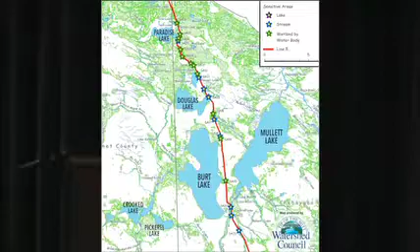This particular pipeline happens to traverse through the Straits of Mackinac, but not only that, it also goes under the Indian, Pigeon, and Little Sturgeon rivers, passes in close proximity to many of our sparkling inland lakes, and goes through about 10 miles of wetland habitat.

The wealth of natural resources we have here in northern Michigan make us uniquely vulnerable. A pipeline failure in this region would not only be significant to the health of residents and visitors, but also to the water resources themselves and the tourism industry it provides. We all know our quality of life is linked to the health of our waters, and our economic well-being is linked to the health of those waters.

Therefore, it's in all of our interests to help protect our northern Michigan water resources from the devastating impacts of a pipeline failure. So here we are tonight. Our goal is to bring greater attention to pipelines and the way the community can work collaboratively to reduce potential risks and impacts of pipeline failures. This is critical to the future protection of northern Michigan water resources and aquatic species, as well as local communities that depend upon the high water quality for their way of life.

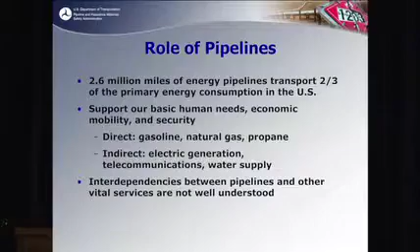Our agency handles both pipeline safety and hazardous materials safety. I'm going to talk about pipeline safety, since that's the office I'm in. We regulate about 2.6 million miles of pipelines that support various aspects of the industry, such as electric generation and transportation systems. Interdependencies between pipelines and other services aren't well understood because the economy is very complicated - one industry feeds another, so the direct role of pipeline transportation is a little unclear.

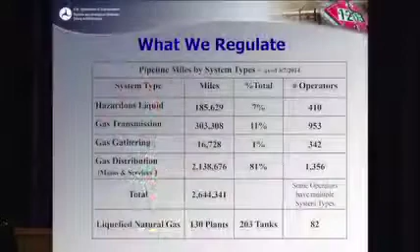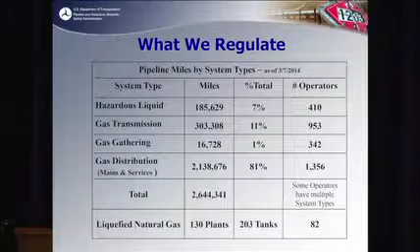Our mission at the agency is to protect people and the environment from the risks of transporting hazardous materials by pipeline. So what do we regulate? There's about 185,000 miles in the country of hazardous liquids pipelines operated by over 400 entities, over 300,000 miles of gas transmission pipelines with about 950 operators, and then gas gathering, and the bulk of it is gas distribution, for which we issue regulations.

Most of the enforcement and inspection activities are done at the state level for all the distribution systems in the country. So if you have natural gas distribution in your neighborhood, it's inspected and regulated by the Public Service Commission here in Michigan.

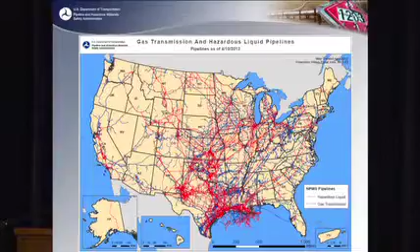So there's a picture of the pipeline system - the red is hazardous liquids, the blue is natural gas transmission pipelines. Historically there was a lot of energy production in the Kansas, Oklahoma, Texas areas, so there's a lot of pipelines that originate in that part of the country and transport material out to this area and others. Approximately 185,000 miles of hazardous liquids pipelines, 70% of that involves interstate commerce. I'll talk about alternate modes of transportation in a minute that present different and higher risks.

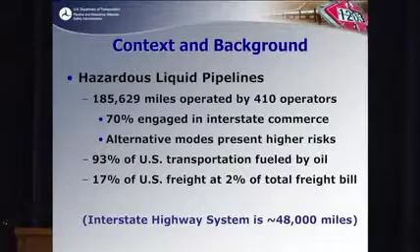93% of U.S. transportation is fueled by oil. It accounts for 17% of the total freight transported in the United States at just 2% of the total freight bill, so it's a very efficient process.

By comparison, for hazardous liquids, there are alternatives. A truck can hold about 9,000 gallons of oil or refined products - that's a pretty big truck, most are a little smaller. Barrels is the term we use more often. Rail cars hold about 33,000 gallons.

If the topic of discussion tonight is primarily Line 5, as Jennifer mentioned, it's not the only pipeline in the area, but the capacity of Line 5 is published at 540,000 barrels per day, which equates to approximately 700 rail cars or over 2,500 tanker trucks - numbers to keep in mind to put into perspective the amount of product transported through the pipeline.

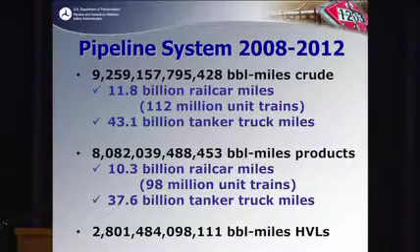So there were over 9 trillion barrel miles of crude oil transported in this 5-year window that I'm looking at, which equates to 11.8 billion miles by rail car or 43 billion tanker truck miles. So that's just the crude oil transported in 5 years.

And also, this is refined products, and this is also highly volatile liquids, HVLs.

Can you hear me when I try and read my slides? Because I hear a difference. But I have to look at the slides or I don't know what I'm saying.

Anyway, the numbers are kind of staggering because you've got close to 20 trillion barrel miles of various products that are being transported in that 5-year window.

And so that slide shows the alternatives at this point in time. We don't have the infrastructure to handle those other methods. And historically, rail didn't account for more than like 2 or 3% of the transportation.

And you see a lot of news now that rail is being used a lot more often to ship crude oil, and it's got some issues, and we're seeing some of those issues. But historically, it hasn't transported a whole lot of the product.

And trucking was really only used to take the gasoline from the terminal to your local gas station. That's the extent of what trucks have been used for in the past for the most part for transportation. The pipelines account for about 70%.

And then the second largest mode of transportation for the oil and refined products is by barge. Maritime transportation was over 20%. I don't talk about that much because they don't do that much around this part of the country.

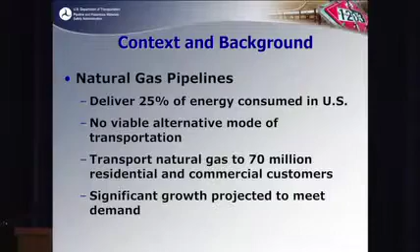So fortunately, it can work convenient. It comes to our house. So, but there aren't a lot of alternatives for natural gas.

This topic of this forum is really not related to natural gas so much, but there is some work being done on railroads. They're looking at some locomotives that are powered by liquefied natural gas, where they can carry a natural gas tanker or two behind the engine and that kind of thing. But it's moved intercontinentally across the oceans.

But to move it around the U.S., it's primarily 100% by pipeline. So here in Michigan, we have some transmission pipeline mileage. These numbers are on our website.

There's a little over 500 miles of pipeline for highly volatile liquids, which is what HVL stands for. That's propane, ethane, other products that evaporate very quickly and are generally gaseous at ambient temperature.

We're a little over 1,268 miles of crude oil pipeline, 1,400 plus miles of refined products, and 8,700 miles of natural gas transmission lines. So that's what's here in your state. And these numbers are on our website. You can look that information up if you're familiar. I'll have a link or a slide show on our website here in a minute.

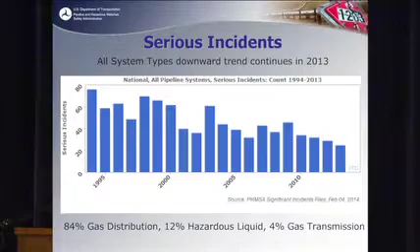Okay, so just to briefly touch on, over the past years the trend in serious accidents has been reducing. Serious accidents are defined as accidents where there was a fatality or some number of injuries. It's a subset of the reportable incidents.

Unfortunately, we've seen an uptick here in the last couple of years on the hazardous liquid accident side. We're not real sure why, or what we maybe need to do differently to reverse that, or whether it's actually a trend or just a blip in the data. But the numbers have not been so good the last couple of years in that program.

So the numbers are a lot higher if you look at the causes for excavation damage, for example, in distribution systems, which is why we focus a lot of attention on it. These other items we address during our typical inspections, we always look at their corrosion programs and things like that to try and get a handle on those processes.

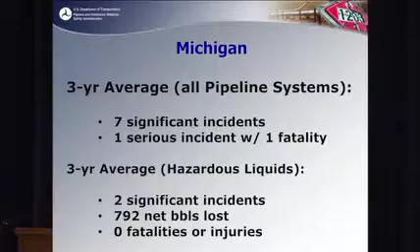We also have a number for the barrels spilled, but they recover a certain amount of that or some portion of that, so they'd also report the amount that was lost net. But in those hazardous liquids, there were no fatalities or injuries in that 3-year period here in Michigan.

So, 811, we always support the effort here to call before you dig to prevent the excavation damage.

We don't oversee pipeline siting or routing, so you see a lot of discussion about new pipelines. The next item here, eminent domain - people get their property condemned for a new pipeline to cross it. We don't give them that authority. We don't have anything to do with that process.

We don't monitor or track commodity shipments. We look at what products are in the pipeline because we have to look at the threats to the pipeline. So we understand what products are being transported, whether they're corrosive, those kinds of things, whether internal corrosion is a threat to the integrity of the pipeline. But we don't monitor what's in the pipeline at any given time. Most pipelines operate in batch form, so a refined products pipeline, for example, there'll be a batch of gasoline going through it, and then they'll switch and start putting diesel fuel through it. They might even put highly volatile liquids, propane or ethane through it, and they're put in batches, so they don't report to us what product is in the pipeline at any specific given time.

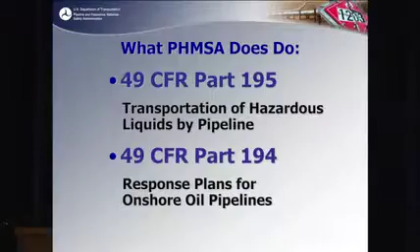So what do we do? Well, we have regulations. We have two primary parts that apply to hazardous liquids pipelines. Part 195 is the transportation of hazardous liquids by pipeline, and that's the bulk of our regulatory requirements for liquid lines. We have another set of regulations for natural gas - they're separate, I'm not going to talk about those. And then Part 194 applies to response plans for onshore oil pipelines.

So how do we spend our time? Well, we spend about 50% of our time doing inspections. We do failure investigations. The stakeholder outreach is what I'm charging this time to today. Construction oversight is also inspections.

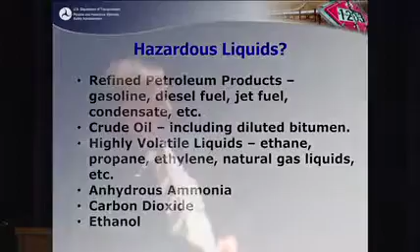So to talk a little bit about what is in Part 195, first of all, what's a hazardous liquid? That part applies to hazardous liquids, including refined petroleum products, gasoline, diesel, jet fuel, natural gas condensate, crude oil, highly volatile liquids, ethane, propane.

A couple you may not be familiar with: anhydrous ammonia. There are a couple of pipelines that transport anhydrous ammonia, not up here, but in the Midwest. Carbon dioxide—there's some more pipelines being proposed for putting that carbon dioxide underground, getting rid of it. They're using it to enhance recovery, injecting carbon dioxide to help produce new oil.

And ethanol was a big thing, and we thought there'd be some pipelines coming around batching ethanol. That's kind of died down. There's some specific things you need to be aware of if you're going to build an ethanol pipeline, but we haven't had anybody, at least in our region that I'm aware of, that's actually built a line dedicated just to ethanol.

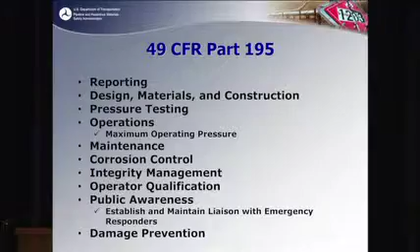So some of the things we have in our regulatory requirements: there's reporting requirements. If somebody has a release on the hazardous liquid side, if it's over five gallons, they have to call and report it to the National Response Center, which is manned by the Coast Guard 24 hours a day. They also have to submit annual reports where they talk about the mileage they have in service, different commodities they've transported.

There's a lot of information in there—they report by decade the year of installation on some of the pipes, they report by diameter, the different pipe sizes. There's some other specific things that they need to report on their annual reports.

We have regulations that cover the design, the material selection, the construction process for new pipelines. We have regulatory requirements for the pressure testing they have to do upon completion of construction, or if they want to revise their operating pressures later on. Our maximum operating pressure that they can establish is laid out in our regulatory requirements.

We have requirements for maintaining their facilities. They have to inspect valves—lots of different aspects of maintenance. They have to do patrolling, so if you have a property that has a pipeline on it, they'll fly it every 2 or 3 weeks. Those kinds of things are covered in our maintenance requirements, how they can do repairs, some things like that.

Requirements for managing and controlling corrosion so that they don't have integrity issues. Integrity management regulations—they have to do assessments periodically to assess the condition of their pipe, and then they have to take actions if they find issues.

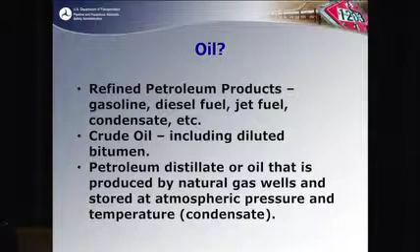Natural gas isn't covered. Anything that volatilizes or is a vapor or atmospheric under ambient conditions is not included. So propane, ethane, they're not included in what's oil. Anhydrous ammonia is not petroleum, so it's not covered. Carbon dioxide and ethanol is the same way. So there's a little different definition of what's covered under Part 194 than what was covered under Part 195.

Their facility response plans are outlined in Part 194, what they have to have in those plans. The plans are submitted to us for review and approval. Those plans need to be resubmitted every 5 years or if there's a significant change in information.

So again, the Enbridge Line 5 plan of interest to you all here is their Superior Region Response Zone Plan, which was submitted and reviewed and approved by our office. And the public version is posted if you go to our website, you go to the FOIA electronic reading room, you can review that plan.

There are portions of it that are redacted. We have the obligation under the latest act that was signed in 2011 to consider restricting back information on the worst case discharge and where that's at and how it's calculated and things like that, for security sensitive type information. And so you'll see that being redacted out of those plans. But the only other thing is personal phone numbers and stuff like that we have to take out.

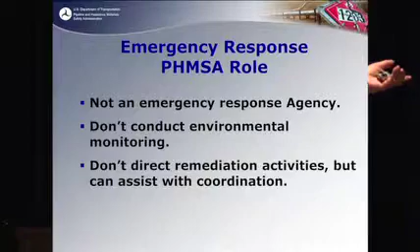So what is our role in the event of an emergency? We're not an emergency response agency. We're not going to be conducting environmental monitoring. There's a lot of environmental responders, and hopefully you talked to some of them earlier before the meeting, that do these activities, that direct remediation. But we have people that are pretty knowledgeable about pipelines and pipeline activities and pipeline maintenance and things like that can be of value to the incident command system during the incident if disagreements arise and they need to ask us a little bit about pipeline-specific questions.

And then, so what do we do? We investigate the cause of the release, and then we make efforts to verify the future integrity of the pipeline. We monitor repairs. We may require a reduction in operating pressure. We may require them to have a written restart plan, things like that before they start back up. We might issue a corrective action order that requires ongoing activities to do other additional inspections or make additional repairs, that kind of thing. That varies on a case-by-case basis based on what's happening with the accident.

And then we apply those findings either to something applicable to an entire pipeline system that we need to address with that particular company-wide throughout their whole pipeline system, or it may be something that we need to consider rulemakings and things like that to apply those findings to the industry as a whole.

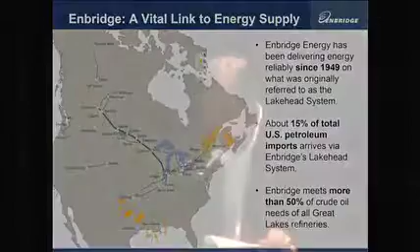So I wanted to start by giving a brief overview of Enbridge and our overall system. We operate the world's longest pipeline system in Canada and the U.S. The system you see across the map on the page is about 50,000 miles of pipelines collectively between our gathering systems, main lines, and others across North America. Movements through our system account for about 15% of all total U.S. petroleum imports through the Enbridge system. We deliver about 2.5 million barrels per day of crude oil and liquids petroleum through our system, and that accounts for more than 50% of the crude provided to the Great Lakes refineries in Chicago, Detroit, and Superior, Wisconsin.

We also are a player in the gas pipeline gathering and processing system. We own about 1,000 miles of offshore pipe and onshore gathering pipe in the U.S. Gulf of Mexico, and we gather and move about 50% of the offshore gas production in the Gulf. On the Canadian side, in Eastern Canada, we own and operate the largest natural gas distribution system in the Toronto and Ontario areas.

We also, as an energy company, have an emerging green energy platform. We currently have ownership interest in about 1,800 megawatts of wind, solar, geothermal, and heat waste recovery through our system, for a total capital investment of about $3.5 billion in green energy technologies.

On the growth side, we've got a number of growth projects underway. I won't get into detail on those today, but they total about $35 billion in committed growth and expansion projects. We've made a commitment to a neutral footprint in our development, and it really stems from our former CEO. It's something we've really committed to, and that's basically we want to produce a kilowatt of power for every kilowatt of power we consume on the pipeline right of way.

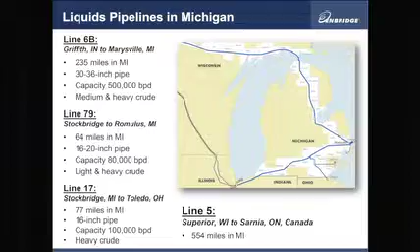And 250 of those employees and contractors are here in Michigan. Looking at liquids pipelines in Michigan, I know tonight we're really going to focus on the northern pipelines. In total, we have 4 pipelines in Michigan totaling about 930 miles of pipe, and that represents the pipeline we're here to talk about tonight across the northern system, Line 5. We also have pipe that traverses down in our 6B pipe in southern Michigan, along with 2 pipes that feed markets in Detroit and Toledo, that being Line 17 and Line 79.

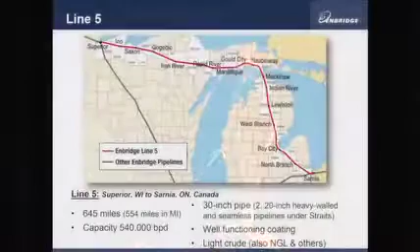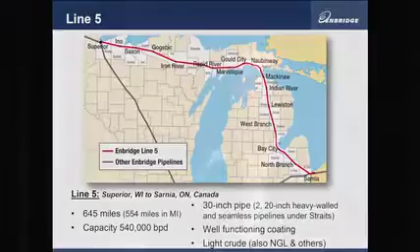Looking more specifically at the northern pipeline in Michigan, Line 5. Line 5 is a 645-mile pipeline. It's a 30-inch pipeline, with the exception of the Straits of Mackinac crossing, which consists of 2 heavy wall seamless pipes under the straits, and then it's back into 30-inch pipe for the remainder of the way. Its capacity is about 540,000 barrels per day, and it's a light crude system, which consists of movements through Line 5 that would include natural gas liquids batched with various light products, including light crude oil and condensates.

As I mentioned at the start, safety is really the cornerstone of our business. We recognize we have to operate a safe and reliable system. It's critically important to us, and it's part of every day, certainly of my life and my role. There isn't a day that goes by that we don't talk about safety, and on a percentage basis, in some cases, the better part of the day is spent on safety and operational reliability. Since 2012, over the past couple of years, we've spent $4.4 billion in the area of reliability and safety, and I'm going to talk about some of those programs as I go through here.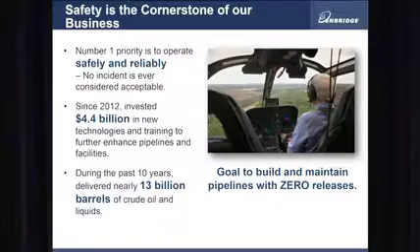We focus on going beyond just being okay. We really want to be industry leaders. We have involvement in a lot of different things, and with some of the programs I show tonight, we get involved with the development of the technology and really push to advance it. During the last 10 years, we've delivered approximately 13 billion barrels of crude oil and liquids. I can go into the safety record, which overall on the barrels is very good, but I want to say that our goal and our target is zero pipeline incidents, and that's our focus.

When you look at safely transporting crude oil, there were a number of different modes of transportation shown in the previous presentation - rail, truck, others. When you look at it from a pipeline perspective, there really are a number of components that contribute to safe operation. That being engineering design and the materials you start out with, whether it be the steel, the coating, the cathodic protection, those types of things.

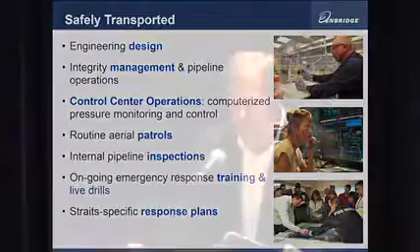The ongoing integrity management, once the pipe is in the ground and the facilities are in the ground - how do you take care of it, how do you monitor it? Control center operations, ensuring that we're monitoring on a 24/7 basis, pressures in the system, looking for anomalies and upsets. We do routine aerial patrols over every foot of our pipelines on a bi-weekly basis, so we have a lot of aircraft in the air. You may see them doing their thing, but we'd be looking at the right-of-way for any problems that can be seen from the air, any third-party activities going on, whether it be excavations and things, to really keep an eye on that.

And then finally, really looking at emergency response in the event that there is a problem - how do we respond, are we trained and qualified? It's an important part of what we do, making sure that we have the training, we have the plan in place, and we are conducting live drills. When you look at our operations in Michigan, we do have response plans, tactical response plans, which lay out where the boom would go along shorelines, where your access points would be - all mapped out in a tactical response plan for not only the Straits, but for other significant water crossings.

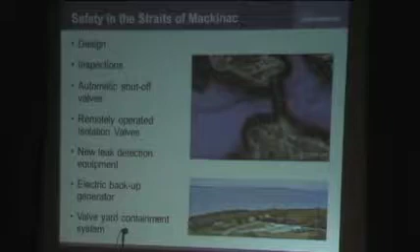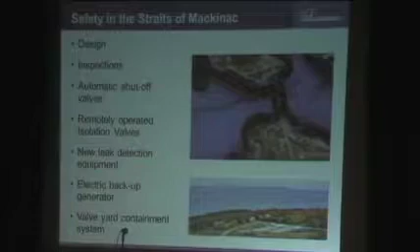When you look specifically at the Straits of Mackinac crossing, it really starts with the design of the system. Back when the pipeline was constructed in 1953, it was an extensive engineering project. It was one that took a lot of attention and focus. It was done by probably the leading energy or engineering company in North America at the time, Bechtel Corporation, and it included peer reviews by the University of Michigan Department of Naval Studies and another university to really make sure we were getting the design right. As we sit here today and look at the current state of the pipe, we look back to that design as being vitally important to that system.

Safety in the Straits involves inspections, and I'm going to talk more about that later, so I won't go into a lot of details, but both inside the pipe, understanding what's going on, and also outside the pipe, understanding what's going on with the environment.

It involves automatic shutoff valves across the Straits. In the event that there's a pressure drop, our control center operators would be monitoring that, and the valves are shutting immediately - sequencing a pipeline shutdown as an important safety feature. We have remotely operated valves, which our control center operators can operate, and new leak detection equipment and technology, really wanting to push the envelope on how small a leak we can detect in the operating pipeline system, and what new technologies exist out there.

And there are a number of them, and we've got a department whose day job is to focus on making sure we've got the latest technology. We've got electric backup generation at the Straits crossings to make sure that we can shut the valves even in the event of a power outage.

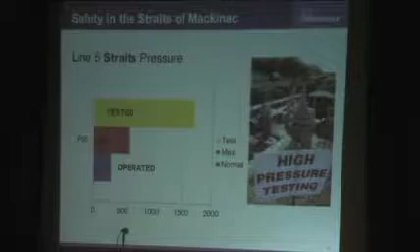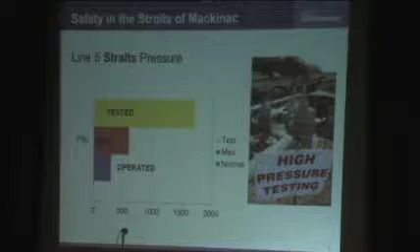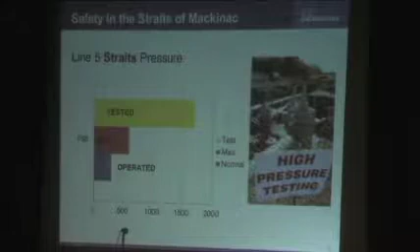Here is just a depiction of our pressure across the Straits. The pipe is about an inch thick, 20-inch diameter, seamless pipe, tested to 1,700 pounds. It was tested again as part of the installation, post-installation, so we defined the upper limit of testing at 1,700 psi. We've established a maximum operating pressure of 600 psi, so we're not going to go over 600. The pressures you see in that pipe today across the Straits are generally under 200 psi, so we're operating some very substantial pipe at a very, very low pressure. That operating range would go anywhere from 0 to 300, but on a daily basis, generally sub 200.

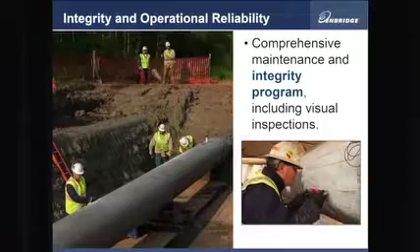I mentioned early on that we spent $4.4 billion over the past couple of years, and one big area is our integrity and operational reliability programs - taking a look at all of our pipelines in our system, doing extensive, literally hundreds of inspection runs through the pipes, identifying any anomalies detected, going out and doing literally thousands of digs, like the one you see on the map here. We dig it up, map anything visible on the outside of the pipe, do UT analysis to see any metal loss on the inside, and do a comprehensive job of evaluating that. If needed, we apply a sleeve that's welded to repair the pipe, and we do that across our entire pipeline system.

There's been a lot of talk about our incident in Marshall, Michigan, which was certainly one of the low days in our organization. It's been near 4 years now, and we've done a lot since then. We've invested a lot, and I wanted to specify exactly some of the things we've been working on since Marshall.

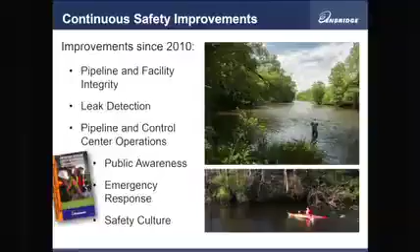Leak detection - we have a department today dedicated to this, their day job is making sure the leak detection we have is effective, which can include mass balance, where we measure what's going in, what's coming out, and the difference, to things like smart ball technology, which puts a small ball through the line, a couple of them, and detects acoustical sounds, to other emerging technologies.

Pipeline and control center operations - this is one area for us that's seen tremendous change, including a new facility. We are operating today out of a new facility. We have new procedures for our control center operators and how they operate the lines. We have new personnel, and our control center operation is now its own department with its own lead. It is fully accountable for the job they do, and we have new personnel in the form of operators and enhanced oversight and training within the control room. So big changes in that area.

Public awareness - we've increased focus on making sure people know where our pipelines are, what commodities they transport, and what to do if they detect anything, which leads into emergency response. We've created an Enbridge-wide emergency response team, pulling members from any department within the company, making sure they're trained to ICS standards - 100, 200, 300 level ICS training - to make sure our team is ready. And then exercises, making sure we're getting out - we've got a big exercise coming up in Indian River in September, which will be a large effort, including Coast Guard, EPA, and others, to make sure we're exercising a plan.

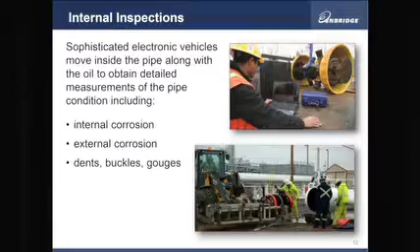Internal inspections. We run internal inspections, and I would say multiple technologies. On the metal loss, the MFL tools, we're making sure we're looking for any corrosion inside or out. We're running the new and latest crack detection tools through the pipeline systems, which uses basically medical quality ultrasound on the pipe walls to make sure we're understanding and identifying any cracks. We also have tools to identify any dents, buckles, gouges along the pipelines so that we can go in after the fact and identify those. That's an emerging area which we've invested millions in to make sure that we're pushing the envelope in terms of what can be detected from inside the pipe.

And specific to the Straits of Mackinac, we're also conducting external inspections of the pipe on a biannual basis. So every 2 years we're doing a full inspection of the crossings. We've developed and are in the process of using both remote operated vehicles. We're also working very closely with Michigan Tech in developing an autonomous underwater vehicle which is able to traverse the pipelines and get good quality data on spans and things like that, and anchors and supports along the pipeline.

And then finally, we do aerial patrols of the pipeline. I mentioned already at least 26 times per year, and then more in areas if warranted. Any of our field representatives, our field people, if there's a cause for needing to shut down and bring out aerial patrol to fly a line segment, they're authorized to be able to do that. And then finally, we're also able to get foot patrols.

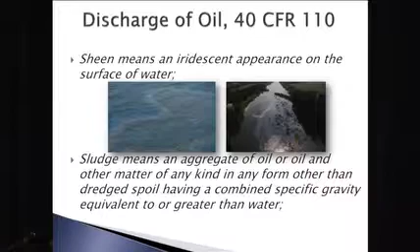So when is the response necessary? According to the Clean Water Act, the discharge of oil is prohibited if it occurs in a harmful quantity. What's a harmful quantity of oil? The harmful quantity is oil that is discharged that results in the occurrence of a sheen on the surface of the water, or the occurrence of a sludge or an emulsion below the surface of the water. That's not a very high bar. It's not very much oil. That's what prompts the need for EPA or the Coast Guard to conduct or to supervise cleanup activity.

Who is responsible, EPA or the Coast Guard? The federal regulation that I'm going to predominantly discuss in the next few minutes is called the Oil and Hazardous Substances National Contingency Plan. It is what describes who is responsible for making sure that oil is cleaned up when it is discharged and how that process is to be conducted.

The Federal On-Scene Coordinator is the entity established by the National Contingency Plan to be at the tip of the spear. They are the spokesperson, the representative of either the EPA or the Coast Guard. So as I proceed through this presentation, wherever you see On-Scene Coordinator or Federal On-Scene Coordinator, that refers to either U.S. EPA or the U.S. Coast Guard.

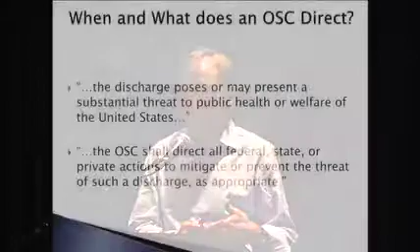EPA and the Coast Guard both have a strong obligation during response to oil spills to keep the public and other stakeholders informed. In some cases, the operative term is direct. In relatively minor oil spills, EPA and the Coast Guard will monitor the activity of the responsible party. But in other spills, what we call substantial harm discharges, EPA and the Coast Guard are not only authorized to direct the cleanup activities, we are obligated to direct. We don't have a choice. We are there to direct the cleanup activities. A substantial harm discharge is one like the spill into the Kalamazoo River in Marshall. That will be a prime example.

And while Congress, in promulgating the NCP, contemplated that they wanted the on-scene coordinators to have absolute authority in dictating how responses occurred, they at the same time encouraged, and this is embedded in the NCP, that it be done cooperatively and in a way that achieves consensus. So that's an important principle embodied in how we do response.

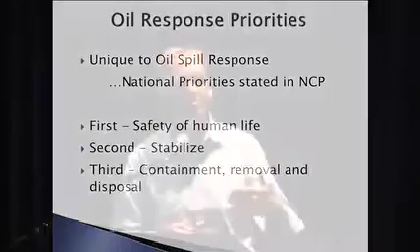So when it comes to the cleanup phase, or cleanup stage, there are several phases: obviously discovery and notification, and then preliminary assessment. You have to go out and figure out where the oil is, what resources have been impacted and affected, how it's moving. You have to scope it - figure out what it is you have to operationally attack to clean it up.

So when I say this, I'm not thinking so much about a few hundred gallons in a pond. I'm thinking about thousands of gallons in a river, a lake, or an ocean. So once you do the assessment, you implement the response activities, and then you do the documentation, cost recovery, and the paperwork that goes with it. So assessment is the first step.

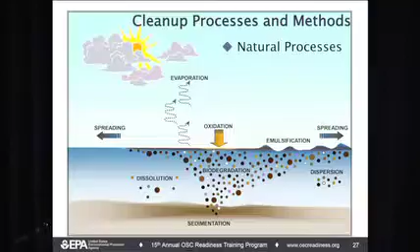There are, when you do cleanup and response, many natural processes which affect how oil behaves in the environment and how you do recovery. Many of these go to what we call weathering. We'll talk more about these processes as we proceed.

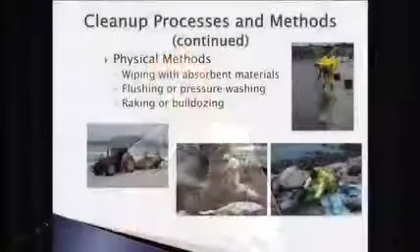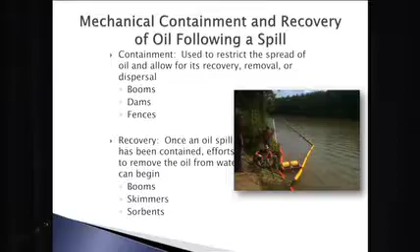But oil spill cleanup generally involves applying physical methods like use of absorbent materials, flushing or pressure washing, raking, bulldozing, excavation. It involves protecting targets that you don't want to get oiled using booms. It involves the use of booms and vacuum equipment and skimmers to contain oil and then to pick up what you have contained. These are common tactics.

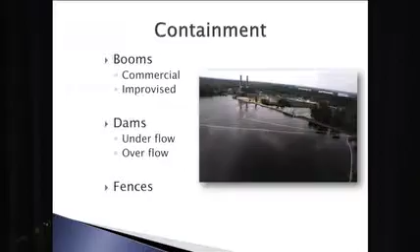Here's an example. The photograph is this is an iconic shot from the downstream extent of the Kalamazoo River spill in Marshall. This is at the downstream end of Morrow Lake, and the Chevron booms were put there as a last ditch effort to make sure that nothing got past the final dam in Morrow Lake, which was about 35 miles downstream of where the break occurred.

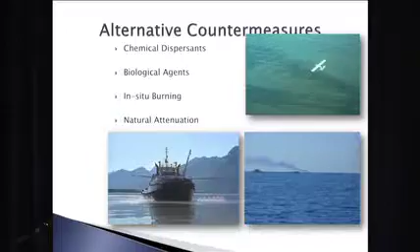The EPA and the Coast Guard are also the ones who determine what types of alternative countermeasures might be employed in the event of a spill, whether you're talking biological agents in the case of an ocean or marine spill, in situ burning, or a decision to go with natural attenuation.

Recovery and rehabilitation of wildlife is a very big component of spill response.

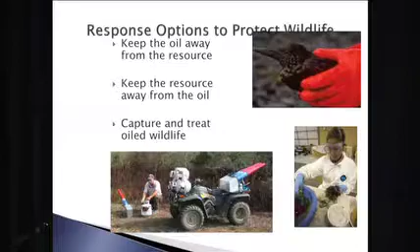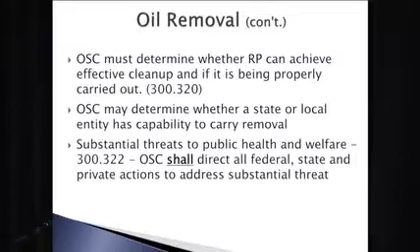So part of our job, part of EPA and Coast Guard's job, is to determine whether the responsible party is capable of doing the work, whether they're financially viable. And if they're not, then it's possible that we make a decision to federalize it, to assume control of it. And as I said at the outset, in the event of substantial threats, we are obligated—we shall direct.

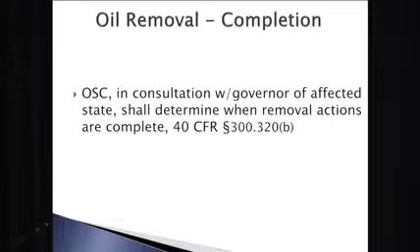Who determines when the cleanup is done? Who determines how clean is clean? It's the federal on-scene coordinator in consultation with the governor of the affected state. And what that means is that the federal on-scene coordinator in the state of Michigan would coordinate with the Michigan Department of Environmental Quality throughout the recovery to say when we're done, when enough is enough, and when EPA will transition it to the state.

We also work with NGOs, state and local partners. Just as Brad Shamla with Enbridge discussed the importance of safety, pursuant to the NCP, EPA and the Coast Guard are ultimately responsible for the safety of all of the workers on the response. We are also responsible for coordinating with the health agencies and local emergency management agencies to ensure public safety. Public safety can very often be a real issue, particularly in the early days of the response, particularly when there are large volumes of oil—whether it's tar sands oil, gasoline, cooking oil. When you have a lot of oil on the ground, you can have public health issues, whether they be air issues or water issues, and those are paramount.

And obviously we have documentation and reporting functions. Finally, I'll wrap this up. The other major task that the National Contingency Plan requires EPA and the Coast Guard to implement is what we call area planning, or contingency planning.